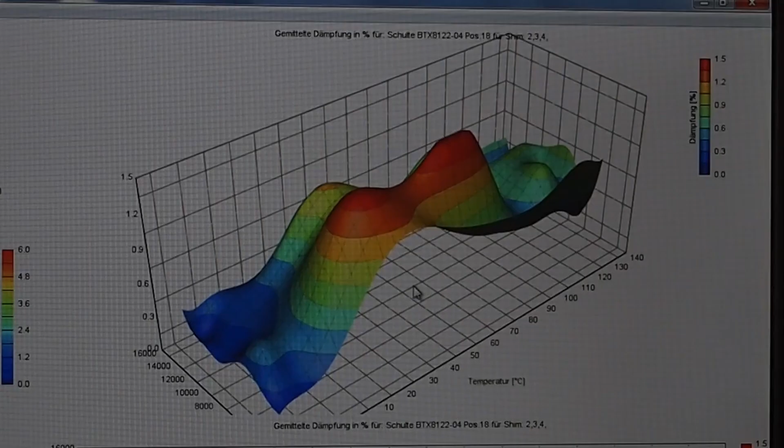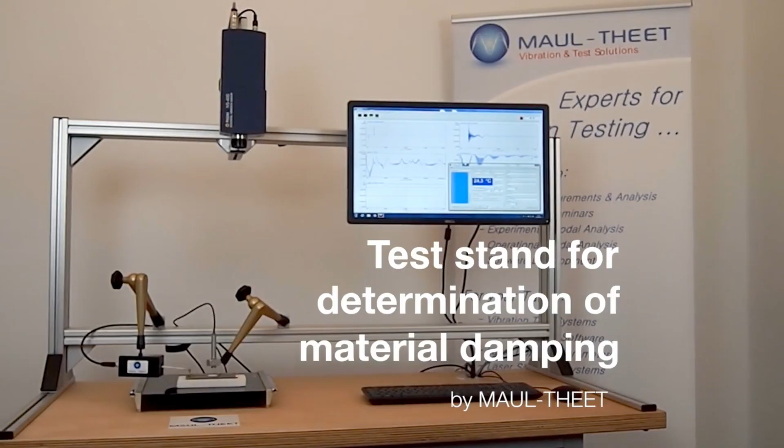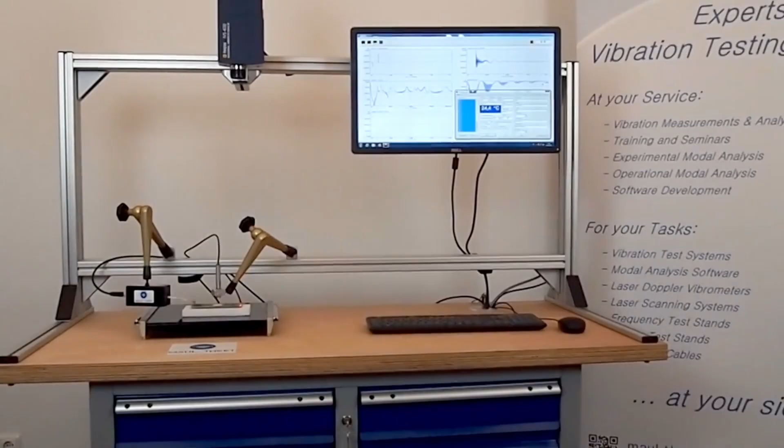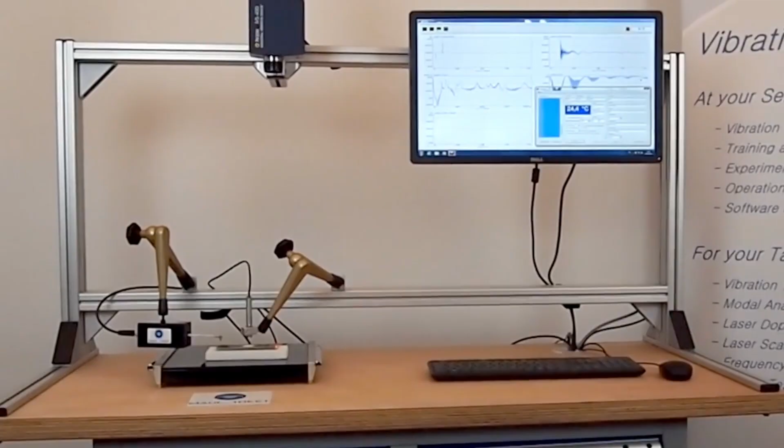The shim test stand is a test stand to estimate the modal damping by vibration measurements of so-called shims. Shims are materials which are useful for car brakes to avoid, for example, brake squealing or other issues. This test stand is a test facility which allows you to do most of the measurements automatically. That means you don't need blue-collar workers or any staff to perform measurements which are very time consuming and therefore expensive.

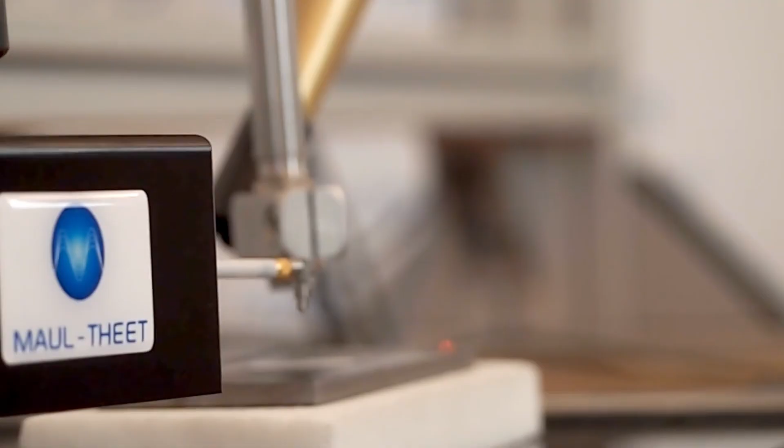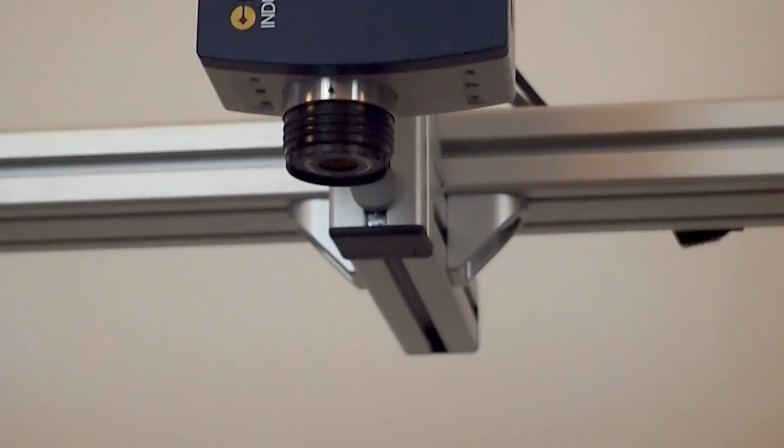On this test bench, we estimate the modal damping from the free vibration of the test object. So that means we need some excitation. In this case, it's a modal hammer, an impact hammer. We also measure the force. So that's the excitation. The free vibrations we measure with a laser Doppler vibrometer. And as we want to do all the measurements depending on certain temperatures, we also have to measure the temperature.

All those units we are using are working contactless. This is very important because any contact would have an influence on the free vibrations and therefore on the results of the damping values. So we have an excitation, we have a laser vibrometer. For sure, we have to measure the vibration, we have to store and analyze them, and finally some tricky algorithms to get the damping.

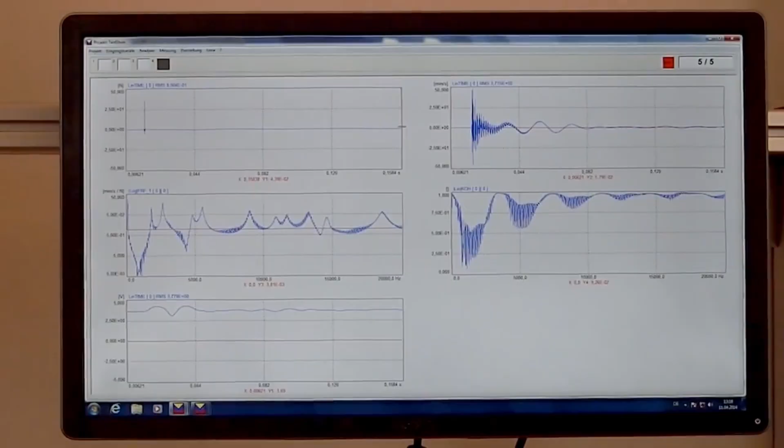Shims as used in the car industry must be measured. The damping must be estimated in a temperature range between 130 and minus 30 degrees. So the procedure starts that you heat up or cool down your test objects. If they reach the final temperature, you get them out of the heater, the oven or whatever. Place it inside the test bench, shift it in the right position so that the laser and the hammer hit your object in the right place. And then just press start.

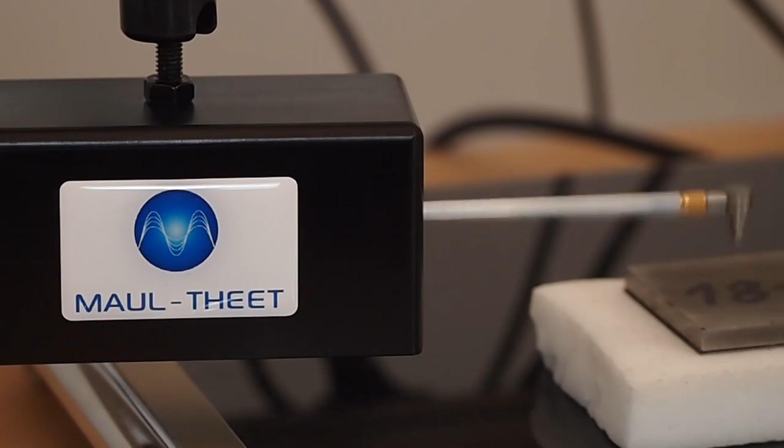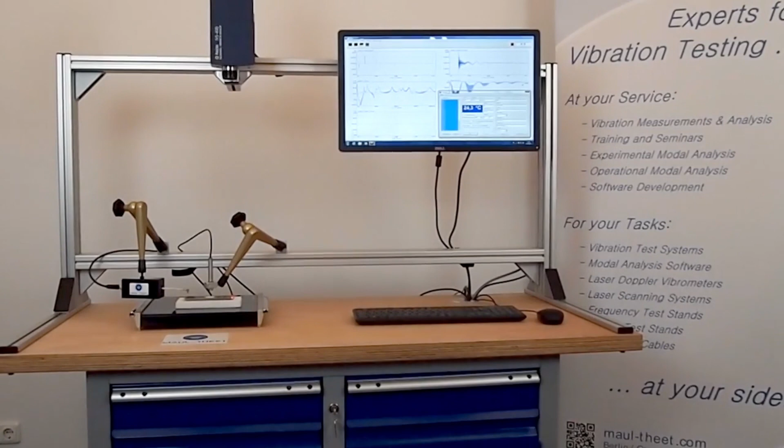The temperature is measured online, so without any interruption. And from a certain temperature list, which you set up before, the measurements will be done automatically. Once the temperature reaches a temperature from the list, the measurements are started. The hammer does the necessary impacts, mostly 5 or more, to get some averages. And the vibration results are then stored on the disk. Then the whole operation goes into a standby mode, waiting for the next interesting temperature, and the measurement starts again.

The information of damping is nothing new. This has been done for years in industry. But all these measurements are normally done manually. That means you have to do the excitation via hand hammer, you have to store everything manually. And therefore all those measurements are very, very time consuming. Even if you go for only a few temperatures, this may take hours.

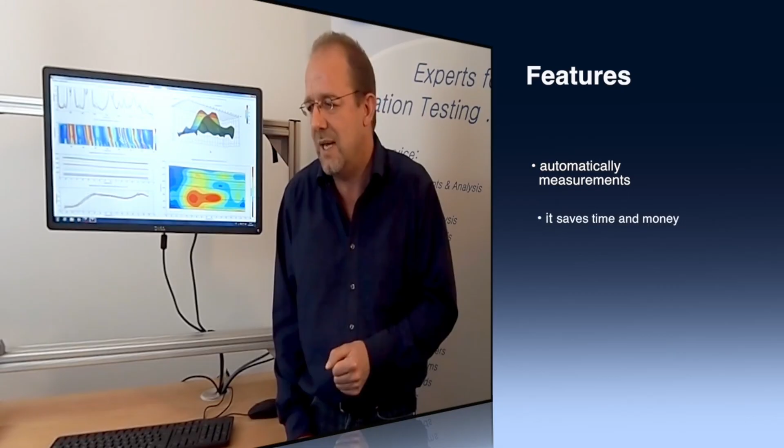This test stand allows you to do the measurements automatically. So you just put in the test probe or whatever you want to test, and the measurements are done automatically. So even if it looks a little more complicated to set up, the testing procedure itself runs on its own, and therefore it saves time and money.

Well, we are talking about vibration measurements, and therefore to set up the test bench, it's quite useful to have some knowledge about vibration measurements. But this is only for setup. Once the setup is finished, once the test bed is prepared, it can also be used by other people. Because the task is you only have to put in the test probe, press the start button, and the rest is done automatically. So if you ask me again, is it easy to use? Yes, it is.

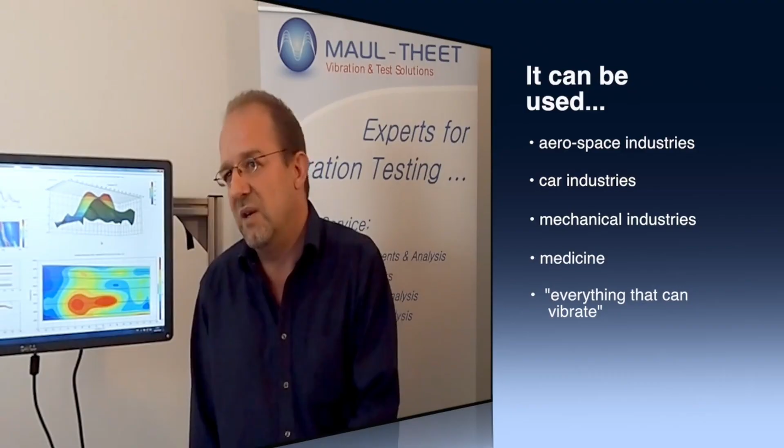In this application, we are using the bench for the evaluation of the damping values for shim probes. But in principle, it can be used for any technical structures where during the development or testing phase the damping is quite important. So if you have parts in the aerospace industry, other parts from cars, in normal mechanical engineering, in medical areas, everything can vibrate and everything must therefore be optimized regarding safety and comfort. And so everywhere the damping is very important for a quick, successful development, and also for simulation. The test bed can be used.

There's no need for additional staff to drive the measurements or to watch them. So a big advantage for sure is to save costs, to save time. On the other hand, the measurements are done automatically. So in comparison to manual excitation, here the reproducibility of the measurements is very, very high. So the quality and accuracy of the measurement data are much better than if you do it manually.

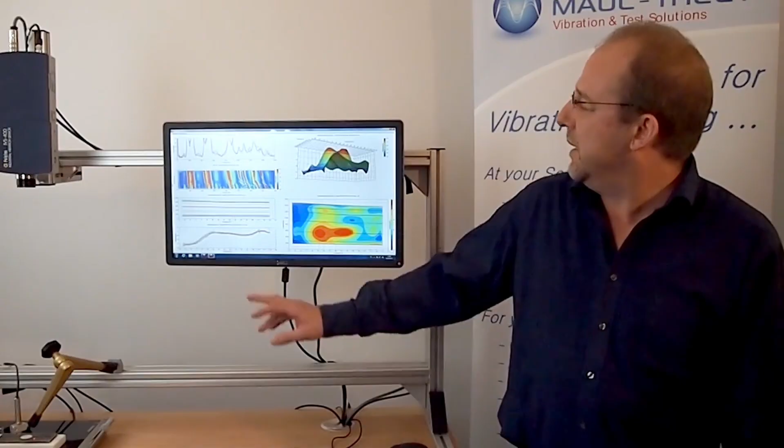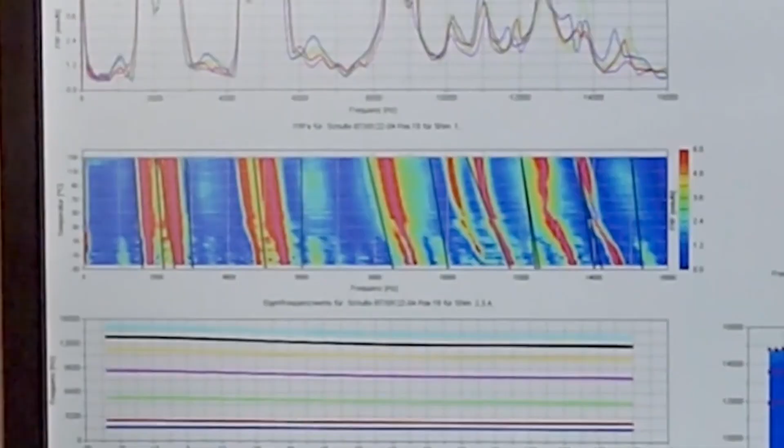The base for any damping estimation is the so-called transfer function. Once a measurement is finished, all the transfer functions can be displayed in this diagram, mostly shown as an overlay. So here you see exactly whether all the measurements proceeded in the way you expect them. Then we are doing a so-called contour plot. This shows you that the natural frequencies, when we go for the damping, are temperature dependent. So we are going for the peak picking. From this peak picking, we can then estimate the damping values, mostly by the algorithm for the so-called half power bandwidth, the -3 dB, mostly well known.

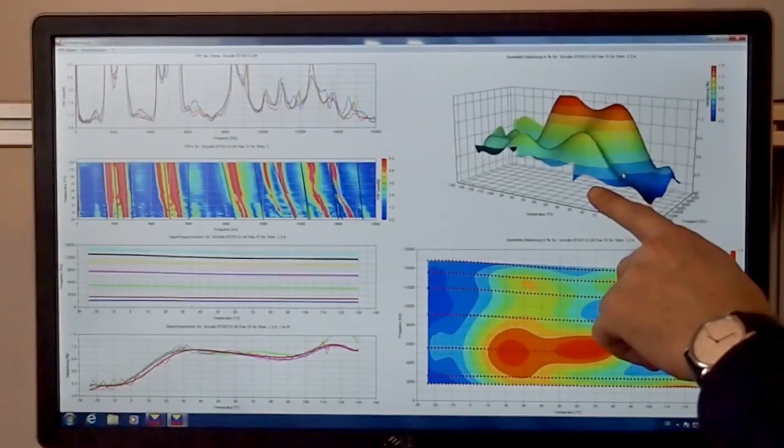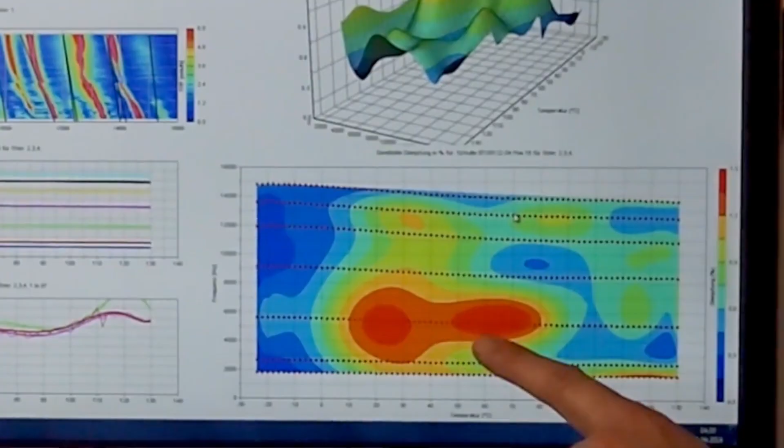And finally, we can show different displays like here this waterfall diagram, which gives you your interesting damping value depending on frequency and temperature. Also this nice contour plot. Here you see where we have these red areas. Here we got high damping for this temperature and frequency range. This shim would be, let's say, a good material.